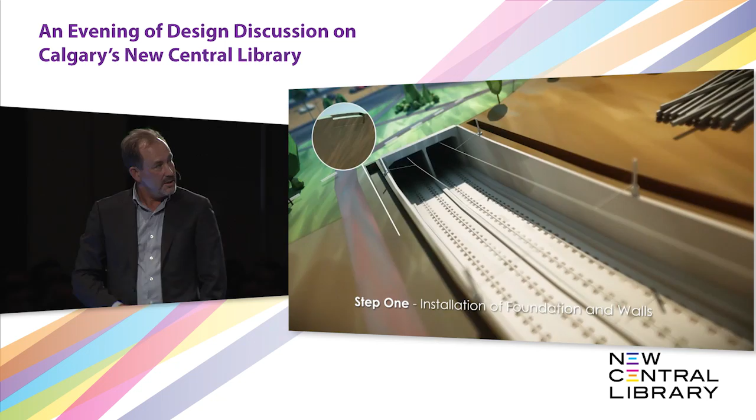So we're going to switch to a little video that shows you really what encapsulating a train looks like. You'll see a high-speed train coming through there, and you can see us building the foundations on the sides of that train tunnel, with the columns and structural supports coming into play, allowing us to build a safe, covered-over train system on which we're going to build an amazing 240,000 square foot iconic piece of architecture.

All of us in this room, as Calgarians and citizens of Calgary, will one day be very proud of it. We will visit, we will use it for more than getting books. It will become part of the Calgary urban landscape that our friends and relatives and out-of-town guests will come to visit. It will truly be a remarkable piece of the Calgary landscape. So thank you, and I'll pass along to Craig.

Thank you, Rob. I appreciate it. Thank you.

One of the things that we often say to ourselves as we're working on this project is we're not just going to build a great library, or the best library in the world, or the best library that you can sort of find in a book somewhere. We want to build the right library for Calgary, the library that works best for this particular place. Each city, each community is different. Each place in the world, each geography you visit has a different set of needs and cultures.

We're always asking ourselves, in this particular moment in time, with the budgets we have to work with, the city conditions that surround us, with the different needs of all of you in the community, are we going to make the right library? Forget about the greatest and the biggest and the best—it's got to be the right library. We're always telling ourselves that as we work through the project and through the plans.

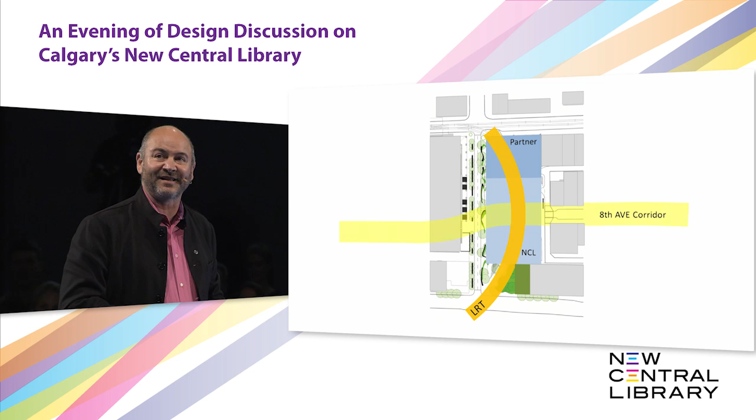But in fact it is bisected by two rather significant corridors. The light rail transit line, the LRT, moves in a north-south direction in a curving line that isn't parallel to the ground because there's a tunnel the light rail dives into. In addition, there's a pedestrian corridor created from the west to the East Village called the 8th Avenue Corridor, which will become more used as the East Village grows around the site. We wanted to keep that open so people could move freely between the cultural districts of downtown Calgary and the East Village as they grow and blossom in future years.

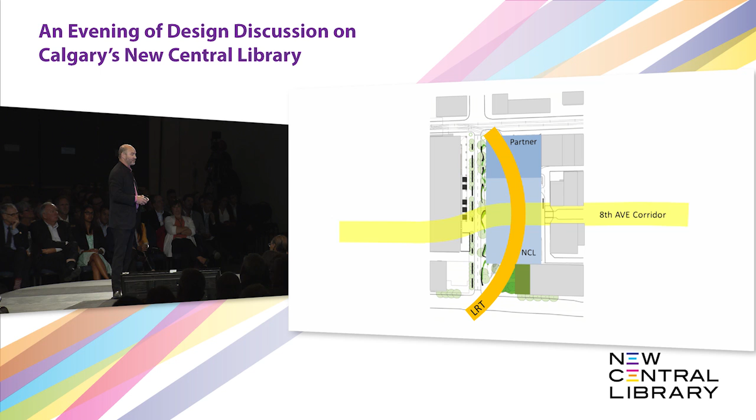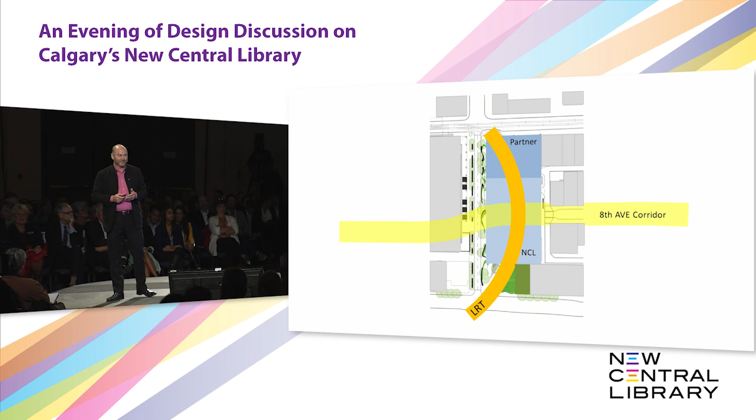So you can see now that what was essentially a square site is cut into all kinds of small pieces, and right in the middle is where you want the heart of the library. How do you make a building here? Even though this seems like an odd challenge, it also represents an opportunity—we call these problematunities, problems that have an opportunistic quality about them.

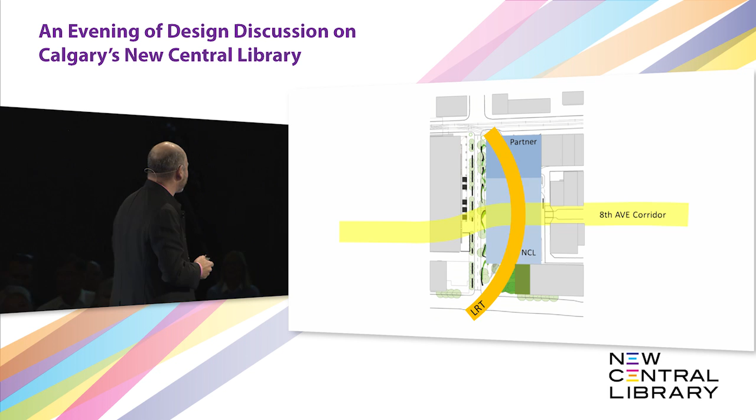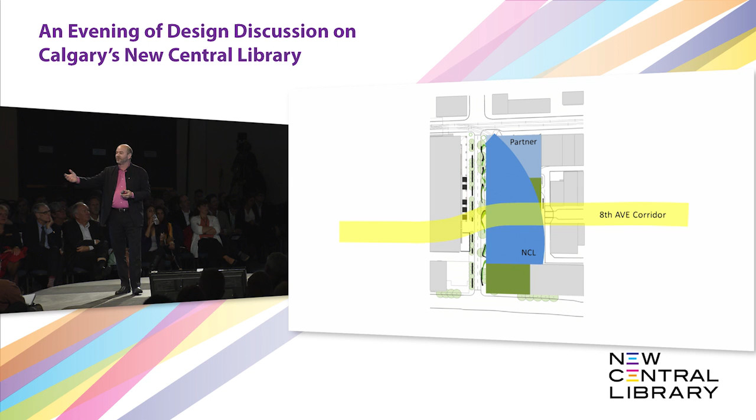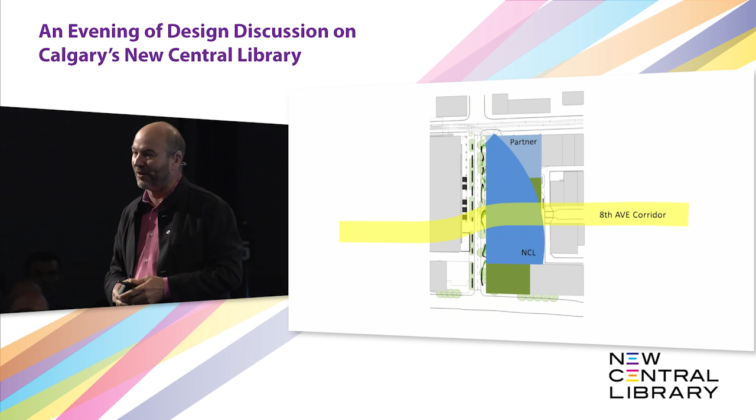What we looked at was forming the building around this curving form of the LRT line, allowing it to rise up so the pedestrian 8th Avenue corridor can flow freely underneath—then you have a really interesting building. If those things weren't there, it might just be a square sort of thing you'd find anywhere else. It's exactly these challenges that have made this process very interesting for us.

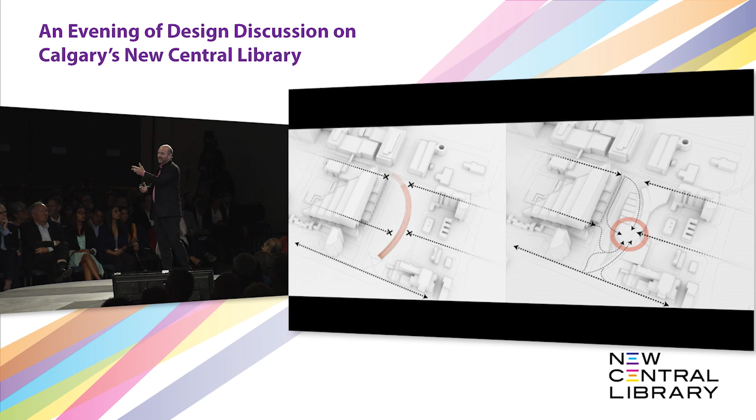Still, you've got to get the thing to work. The LRT goes right through everything, and that's exactly where we want the heart of the library. So we began to talk about different ways of bringing this heart to the center of the building.

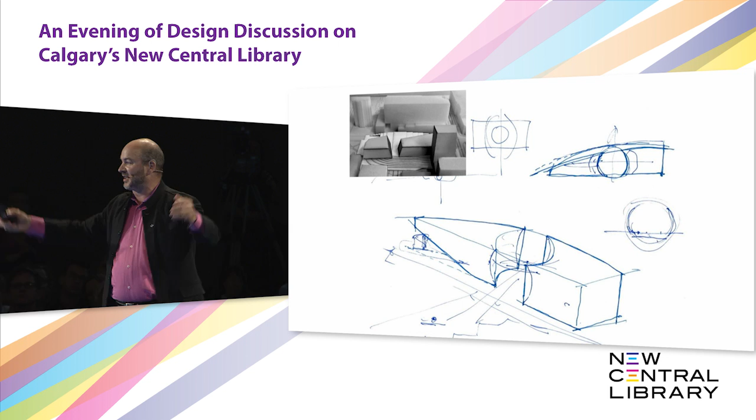We thought it'd be nice to show you some of the early sketches we've done, not just the way it is today, but where we started. This was one of the first sketches in the process—you can see we created a very large atrium space in the center of the building where you could stand and look up and see the sky.

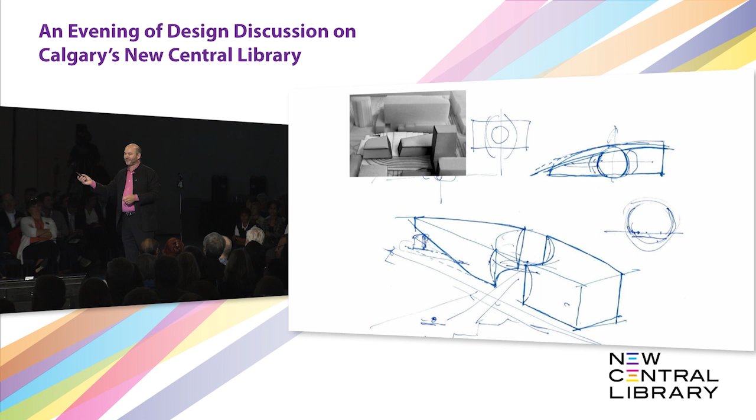But it meant we'd have to divide the library into two parts so people could move freely through it, and this would not be a functionally decent way to make a library. At least the librarians wouldn't be very happy having to walk inside and outside all the time to get back and forth between different parts. So we recognized we had to go a different route.

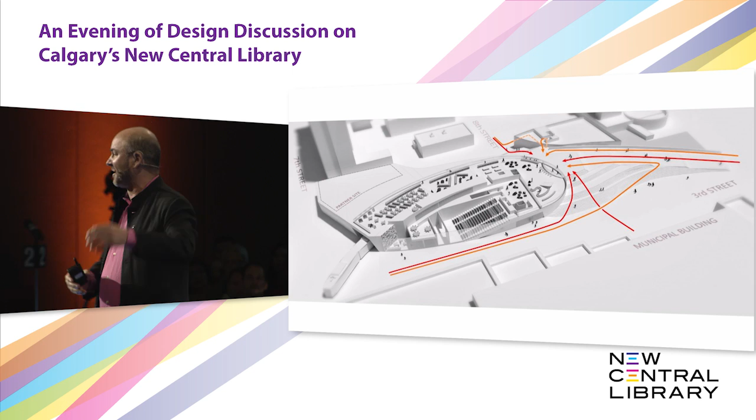Suddenly we saw that if we lifted the building up and created the library almost as a bridge over the corridor, we would have this wonderful landscape freed up from the building's footprint, and we could create a series of soft terraces and ramps leading you up over the light rail tunnel and back down the other side, so you could move from the municipal building to the East Village.

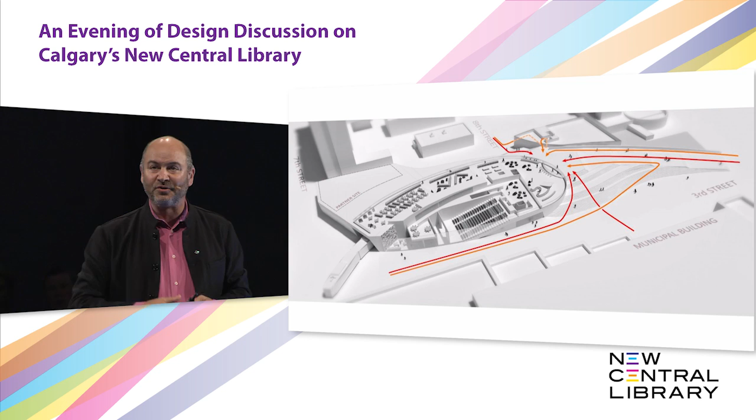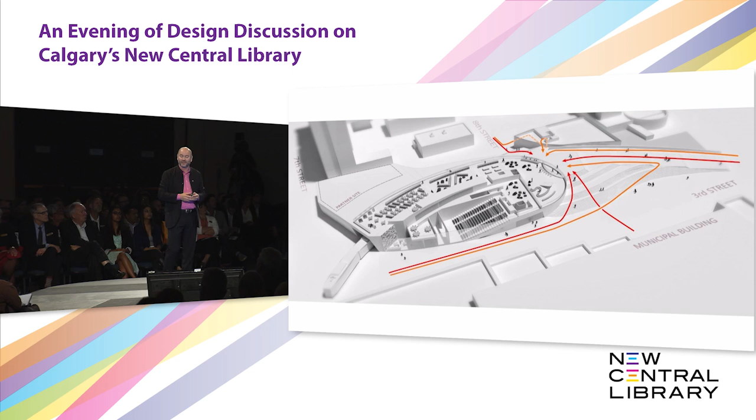On one side would be the entry to the library, with a wonderful public forum featuring an auditorium and community use space, entrepreneurial space, directly on the street on 3rd Street. On the other side, you would have facilities related to administration and operations of the building, leading through to the reading rooms.

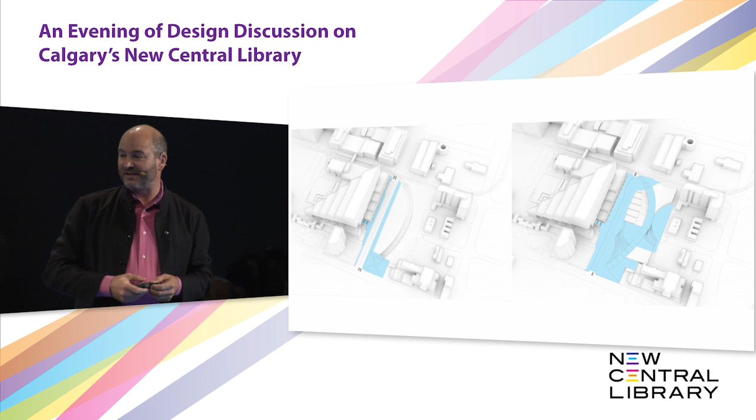We recognized it must be necessary to create more than just a building—we're not just talking about a library inside. It's also outside the library that is very representative and important to the people of the community. So we thought maybe we could create a garden or park-like atmosphere, a kind of library plaza, almost like the old library here in the center of the city that sits in its own grounds.

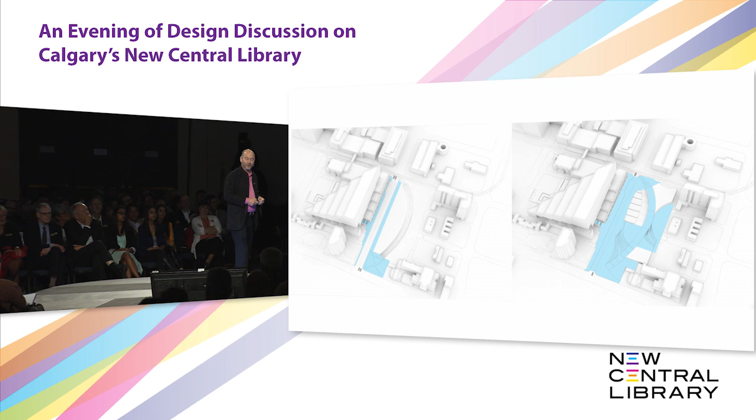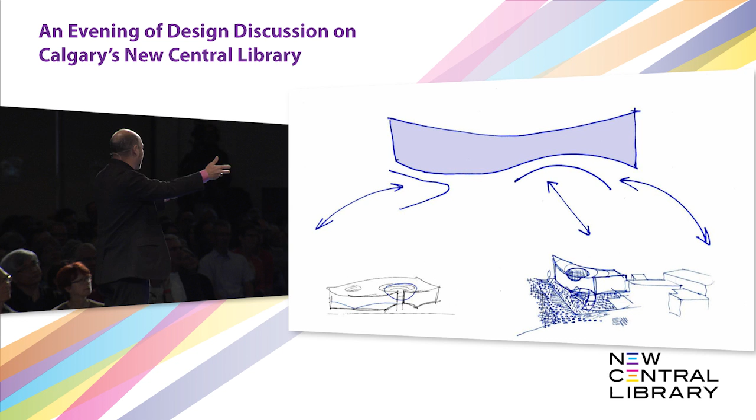This is very difficult to do in a traditional situation in an urban environment where there are just roads defining the perimeters of your site. But we made a lot of sketches. We showed you could soften 3rd Street, potentially make it more pedestrian friendly, create these beautiful curves where the building would lift itself off the ground and allow the passage to move freely and the LRT line to move freely under the construction. That was a very early sketch that we had.

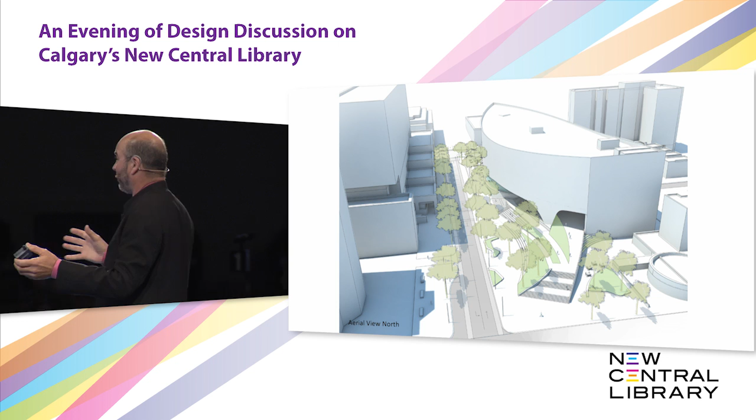We moved from there to some more detailed sketches, and you can see in this very early sketch that there's a series of ramps and terraces, and they're curved. They're curved precisely because they're mimicking the curvature of the LRT line, which is underground, under your feet. And those lead you towards the door, towards the entry, and create this very unusual form, a very beautiful organic form, not the typical form you might see in an office building or a commercial building. And that was exciting to us.

But we had to ask ourselves, eventually, what is a library? This is the 21st century. People like to say all the time, why do we need libraries? I've got my iPad. And of course, we all know everything on the internet is absolutely true, so we don't really need books. This is an interesting question at one level.

But of course, we all know that now, in this age, as technology grows around us, we become ever more concerned with making connections to people and finding places where we can reconnect to those around us. So the library isn't really about books. It never was. It's not really about computers. It never will be. Computers one day will be gone also, and we'll have some other kind of technology that we interact with. Libraries have always been about people, and this library has to definitely be about people because it's a burgeoning community, a burgeoning city on the cusp of a new life. And so we found that very interesting too.

I can tell you for a fact, we're seeing more libraries built now than probably we've seen in the last 20 to 25 years. The need is growing greater and greater. And that's because these buildings are not just resources. They're places where people want to be.

They just want to be there. They want to meet other people. They want to hear different points of view. This can't always be done on a cold sidewalk in the winter in Calgary, or up in the garden of a shopping center. Sometimes it has to be done in a place that is tailored for that kind of environment. So that pushed us a little further to create a very dynamic program that was based on the community input that's been talked about earlier.

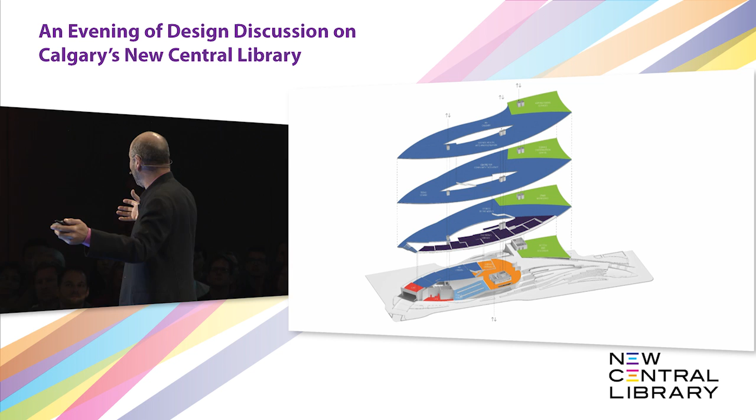As you move through the building, there's a wonderfully wide entry that can be used for community events. Leading from that entry there's a series of very soft terraces, just over the light rail transit line, that will have reading areas of contemporary issues just immediately by the door.

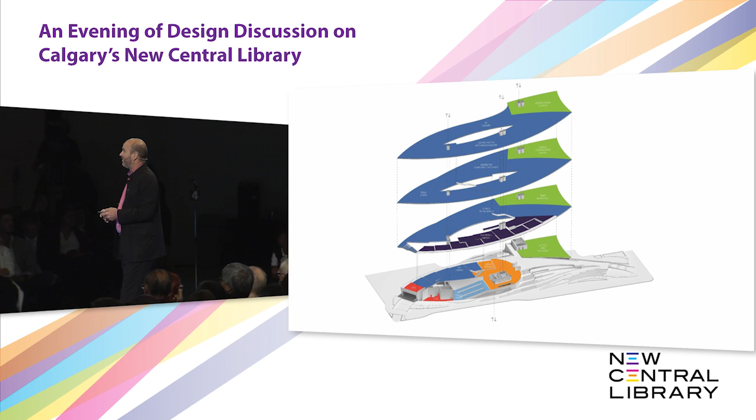As you move up the building, there's a dark blue area in this drawing with a children's library for different ages from 0 up to 10 and 12 years old, and then of course teen services and young adult services higher up in the building. Different reading collections, and as you move higher and higher in the building, you get a greater view of the city around you, and it'll be a little more introspective, a little quieter.

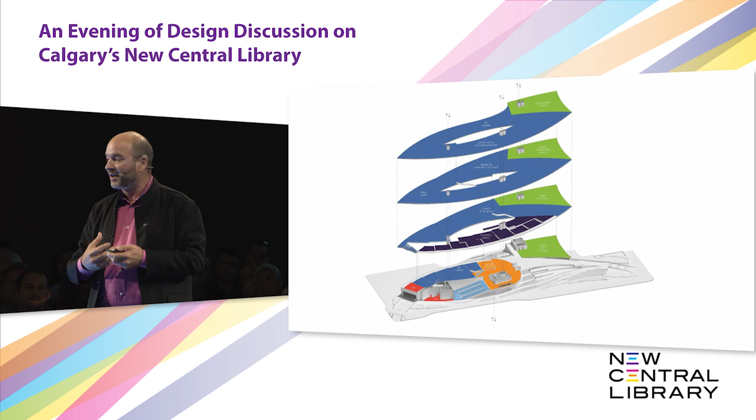There's a full range of reading areas and use areas in this building. Some of them are going to be loud and crazy, and some of them are going to be very quiet, a place where you can relax and come to terms with your own thoughts. So all of these places need to exist in the 21st century library.

The building is stacked in a way because it has to go up several floors, and because of the fact that you have to go up in the building, it's not on one floor, we've tried to create a system where once you enter the building, you know immediately where you are and where you want to go.

Traditionally, libraries have been very hard to figure out where to go. I'm sure some of you have had situations where you've gone into a big, complicated library and asked, where can I find the fiction section? And they tell you to get in an elevator, go to the 3rd floor, find the toilets, take a left on the corridor, and then ask somebody where the fiction section is, and eventually you'll make it. This library won't be like that. You'll be able to create your own mental map based on this atrium that brings natural light deep, deep down into the library building itself.

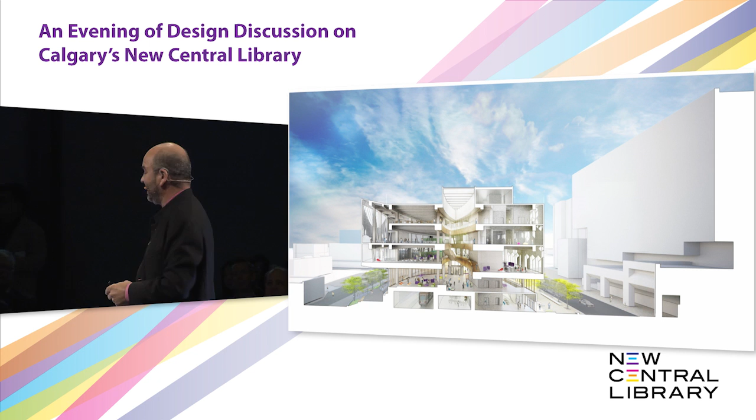And as you move through that atrium, there'll be a series of stairs, terraces, and ramps that allow you to spin around in the building and discover new things you might not have seen if you just took the elevator from the first floor to the fiction section. So you can always interact with the collections in new ways.

So here's the first image of the actual design. We'll start with the interior. Here you can see the main atrium space lifting up over four floors high to a naturally skylit culmination that allows you to understand not only the floor you're on, but all the different levels in between and the different types of reading areas.

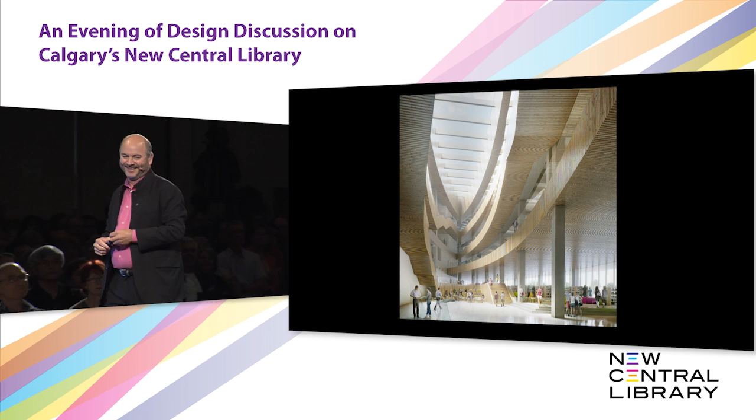You'll notice that there's a great deal— oh, you're not allowed to do that, I don't think. Oh, but you can take a picture of my derriere. That's a... anyway...

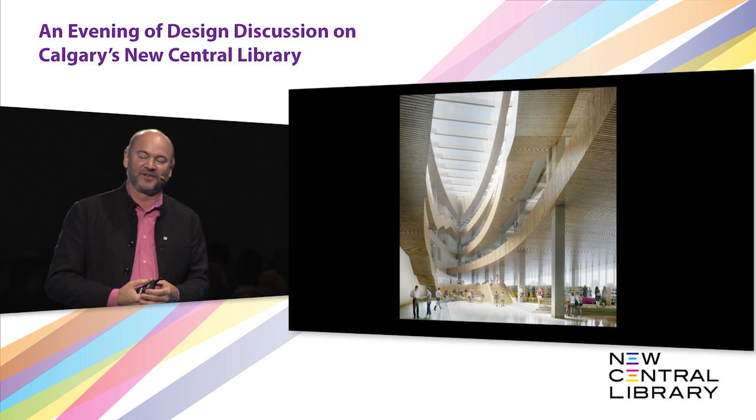You'll see there's a lot of natural wood here, and we're creating materials that are sensuous, materials that you can touch, that feel good to the skin, a lot of light colors so that it will feel bright and airy at different times of the year.

As you move up the atrium space and look across to the collections themselves, you'll see different types of seating environments. Some of the seats will be hard, some soft, some colored, some natural colors. You'll see different types of ways of sitting.

Here you can see we've incorporated a small amphitheater, fixed seating, just next to the stair. Each of the stairs that go all the way up the building are actually very short-run stairs, right in your center of view, so people will almost be invited to take them. Before they know it, they've taken the stairs to the 4th floor—something they wouldn't ordinarily do in a building, and hopefully they'd have enjoyed that experience. That's a big characteristic of the library: to get people to move.

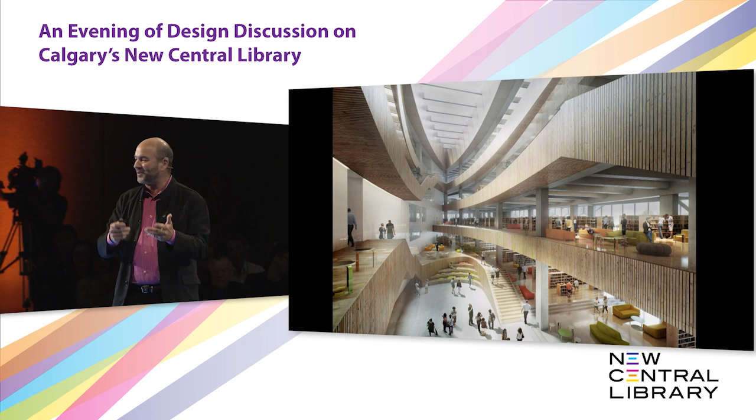We wanted to recreate this idea, because libraries are returning to this model that existed 2,000 years ago. Today, libraries are places where people come and interact with each other, just like they did in ancient Greece.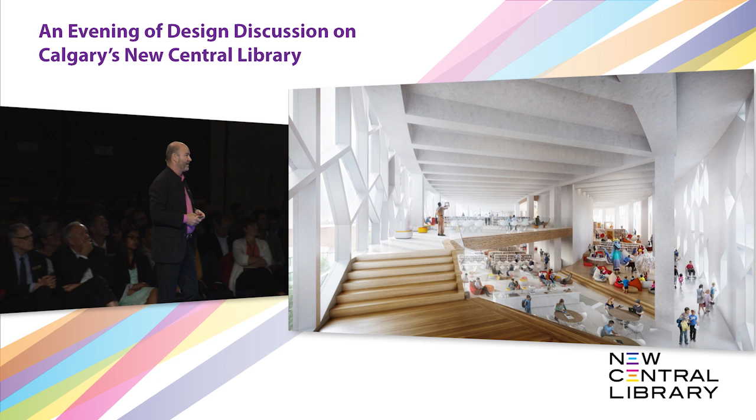So you'll find in the new design some characteristics of that: the way the structure appears, the rhythm to the structure, the way there's light on one side and less light on the other in different parts of the building. So you're always gauging your movement through the building.

Again, the use of wood and natural colors helps guide you through the spaces. There'll be some spaces that are single height and some double height, giving you tremendous, commanding volumes with views—in this case out over the East Village on the top floor of the building.

And of course, all the time you're in the building, you're experiencing the exterior as well as the interior. Well, what is outside? It's Calgary. And that is a very important question.

What is Calgary? Some of you can answer it—Rob can probably answer it because he grew up here. But people like myself who are guests or visitors really have to try to understand it. Perhaps it's the outside perspective that gives us a different way of understanding what Calgary is. But I've been here many times, and our design team have been here many times, and we always learn that Calgary is a unique destination, a unique home between the prairie and the mountain.

There are different characteristics of the weather here that you don't find anywhere else, and different geographies that are quite unique—places where the mountains turn into soft rolling foothills, often covered with wind-blown brown grass as you move closer to the city. These are nice experiences. And as intimidating as the winter can be, I don't think it's that bad.

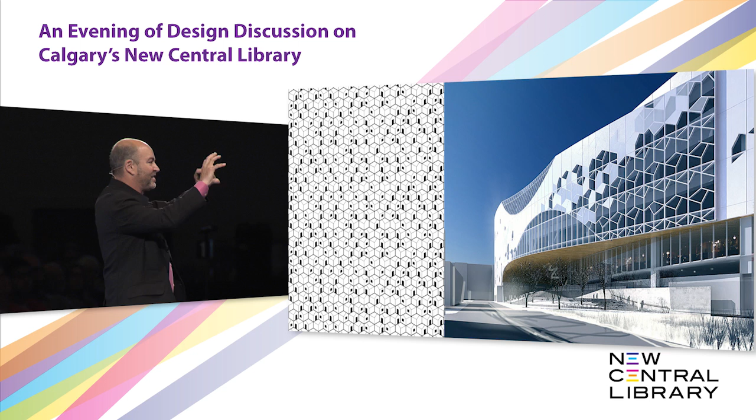So if you look on the facade, it's not your typical square window. It's almost like you're seeing all these homes sort of pieced together. It's not real obvious, but it's kind of there, and we thought that was rather interesting.

The final views you'll see here are looking from the East Village back towards the west. There's an outdoor passage where you can move through without necessarily going into the library. You don't have to walk into the library if you don't want to. You can walk past the door, move back and forth in the city, and rise up into the library spaces above. These arched bay windows allow you to see into the building as well as see out.

Here's a slightly closer view of the main entrance to the building, up above the light rail transit line. I should mention that all of these terraces are barrier-free. The entire building is designed to be equitable for all types of people with all types of ways of moving, and we have a great system of flow through the building in that regard.

This is looking along 3rd Street to the side that faces the municipal building, which would be on the left. The same passage that you just saw, except from the other direction. The planted landscapes around the building soften the landscape as you move into the library itself.

This is a more detailed view. You'll see we're actually cladding the underside of the Chinook Arch in a natural wood-like quality material that will allow us to, again, feel the sensitivity of nature in the heart of Calgary.

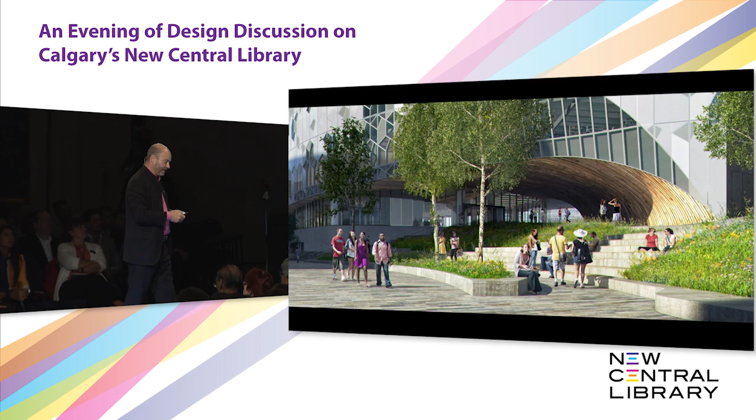And finally, a view of the public forum, which is an auditorium that can be used for events for the city, for the library, by entrepreneurs or by collective groups, that is interlocked with the library itself. So a very dynamic kind of place to enjoy in addition to enjoying the services of the library.

I'm going to conclude very quickly with something that I found rather fascinating as we began this project. I saw this image of an old clay sort of oil lamp, thousands of years old, this tiny little dim light that somehow caught our attention. What is fascinating is that little lamp people used to read by thousands of years ago, in that library you saw, for example, in ancient Greece.

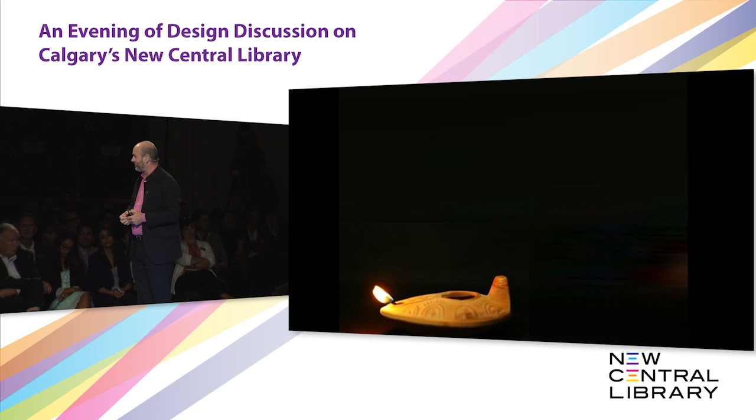It's hard to imagine the great works of philosophy, of math, of science, the great thinking that went into the creation of the classical world that we find much of our heritage based upon, came by the light of that tiny little lamp. Not from the big ceiling lights or from the iPads or the technology. They just came from this little light.

And so we thought somehow that the building could represent this. At times the building feels like this old oil lamp, hearkening to the past, but certainly a part of the future. As you approach the building from 7th, where many of the pedestrians will walk, also from the heart of the city, you'll see the building pulling forward, beckoning people towards it.

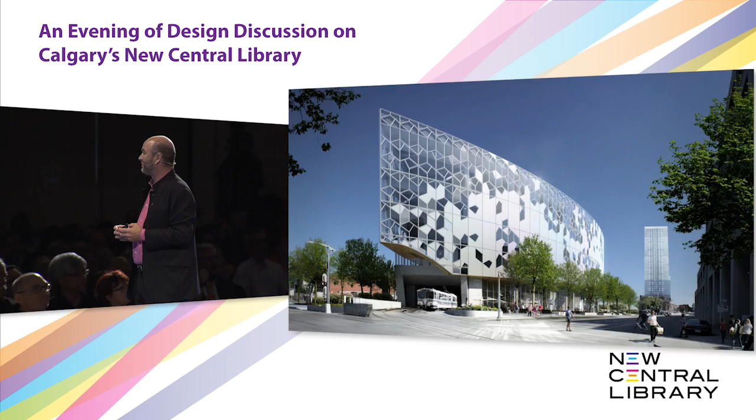At night, it will glow in a very unique way, much like the oil lamp that we saw in the previous picture, and allow people to see themselves in a different way, to find a different memory of their city that yet doesn't exist today.